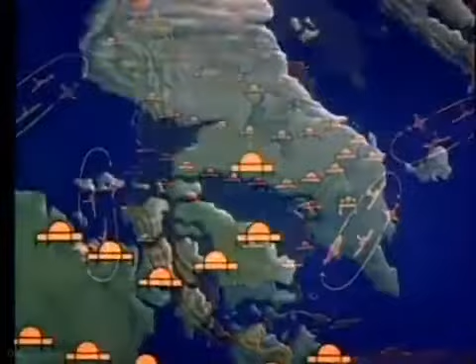These radars never sleep. Round the clock, they stand ready to do their part in minimizing the penetration of enemy bombers. And round the clock, their quietly pulsing hearts, the magnetrons and the klystrons, help generate the power for peace that keeps America strong.

These microwave power tubes, the magnetron to generate the radar signal, the klystron amplifier for radio communication, and radar are the subject of our story.

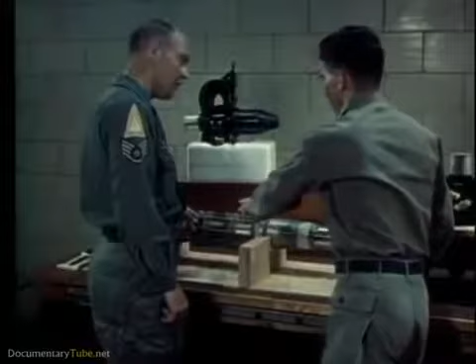It is a story about these vital tubes, but even more about you, the men who work with them. When you have a well-trained maintenance man with a well-adjusted radar at a well-chosen site, then you've really got a winning team.

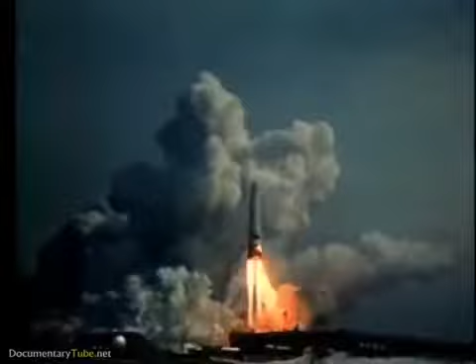They keep the airborne radars operating and ready for crucial missions: in missiles that depend upon radar for guidance, in bombers that depend upon radar for bombing and navigation, in interceptors that depend upon radar for fire control, and in reconnaissance and search aircraft that depend upon radar to extend their vision.

Years of scientific research and millions of dollars worth of equipment have gone into this aircraft. But only if the maintenance men keep the radar functioning can it complete its mission. When something goes wrong, they've got to make a quick decision, whether to attempt repairs in flight or abort the mission.

There's trouble here, that's for sure. But what kind of trouble? First, they check the radar scope presentation. Sometimes this gives a clue. But the most reliable analysis comes from the test equipment on the monitor panel.

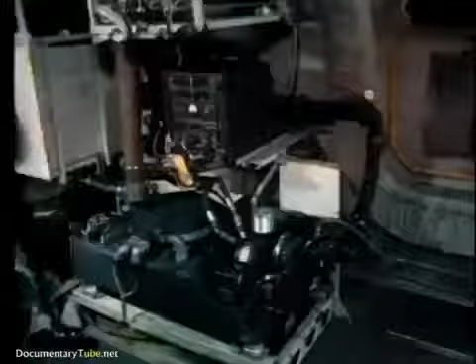Another trouble spot could be the pressurized antenna system. Loss of waveguide pressure will also cause arcing. Yes, the pressure's low. This is a danger signal. If this arcing continues, the magnetron output window may be damaged, the tube's vacuum lost, and the magnetron destroyed.

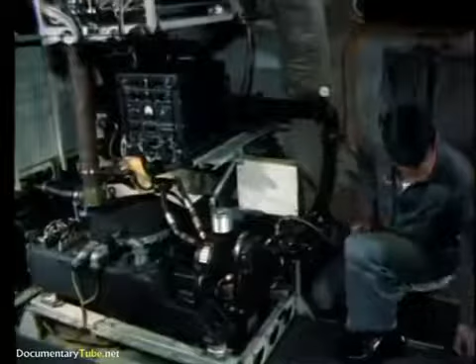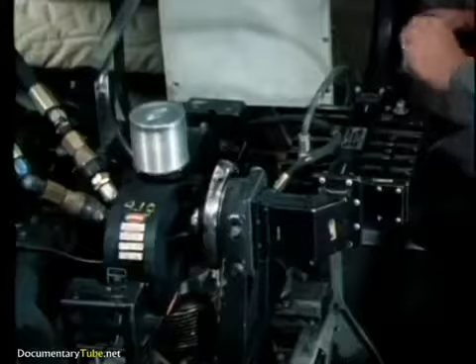Waveguide joints should be tested to make sure they're airtight. This man is making a liquid soap test. See where the bubbles are forming? He's found the trouble. But how serious is it?

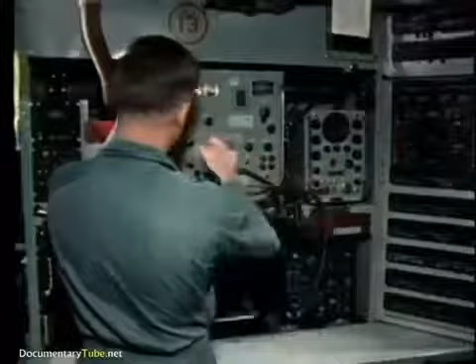He checks the spectrum analyzer again. It looks bad. See how the pulse has changed? Finally, the main pulse deteriorates completely. Bad news. The magnetron is seriously damaged. It's beyond repair. This means shut down the equipment and get ready to install the spare.

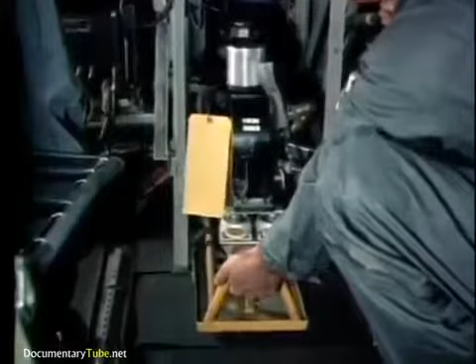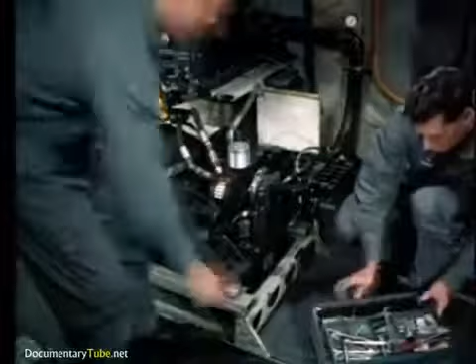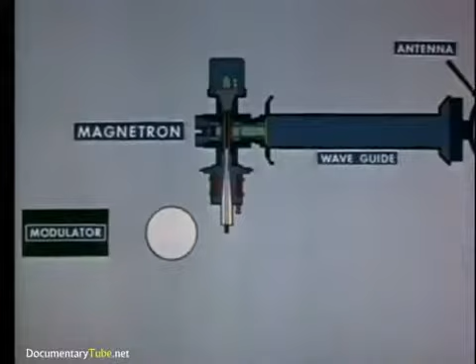While they're working, let's take a look inside the magnetron. Animation shows what caused the malfunction. We'll turn time back a few hours and show the Maggie functioning normally.

As the pulse from the modulator is applied, the Maggie produces radio frequency oscillations to form the radar pulse. This energy is then coupled into the waveguide and directed to the antenna for transmission.

Energy is reflected back along the waveguide toward the magnetron. Normally, when the antenna system is in good shape, the reflected wave won't be strong enough to cause arcing at critical points.

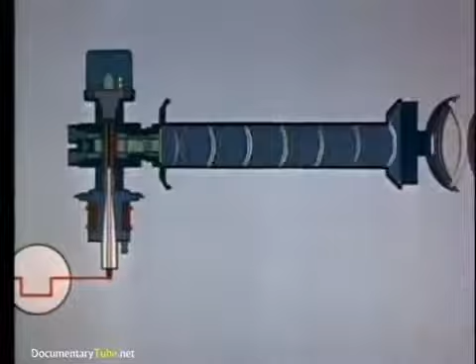But as conditions such as loss of waveguide pressure develop, the antenna characteristics change and the reflected wave becomes greater. Then arcing may take place at the point where the radar wave leaves the magnetron, causing the magnetron output window to crack or puncture.

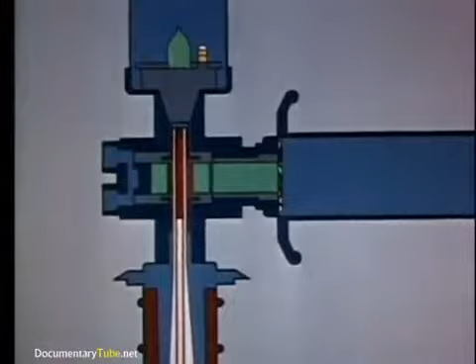As the vacuum is lost, the heater oxidizes and burns out. The cathode cools. Air seeps into the interaction space, and arcing occurs with each pulse.

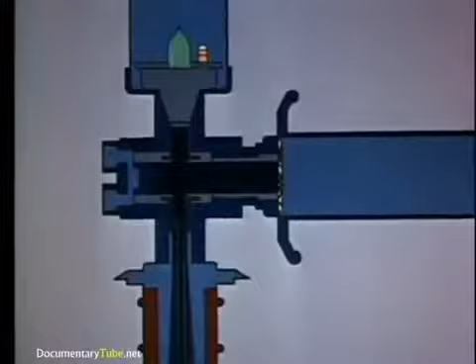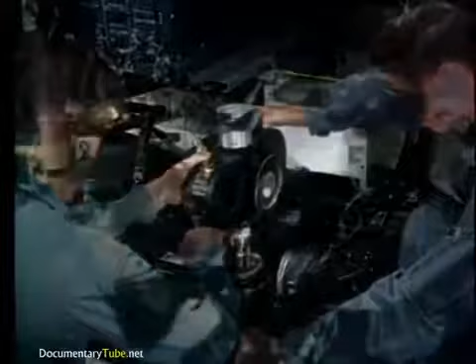After the magnetron has been unbolted, the filament and cathode connections are uncoupled. A large magnetron like this one requires 2 men to handle it safely.

Before a Maggie is replaced, all connections, mating flanges, and sealing surfaces should be inspected. Insulating oil should be examined for foreign matter. Damaged or worn gaskets should be replaced.

Heater's supply voltage should be established at the value marked on the tube. Later, when the plane returns to base, the heater voltage should be double-checked with an accurate instrument.

Now that the spare magnetron has been installed, further tests are necessary. The technician must make sure he has the required pressure and that there are no air leaks. Instructions concerning the care of pressurized antenna systems will be found in the appropriate tech order handbook. The liquid soap method is a simple way to check for pressure leaks and may be used where more accurate means of testing are not available.

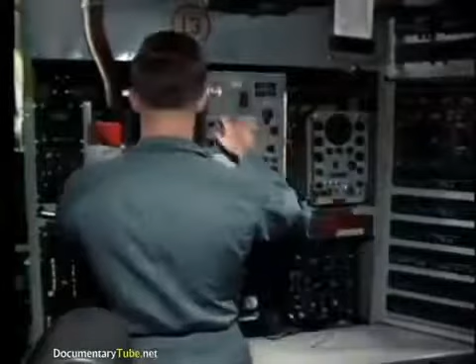Test equipment is used to analyze the performance of a newly installed tube. The output pulse is checked on the spectrum analyzer. See how the large hump, or main bang, is symmetrical and sharply defined. The side lobes are relatively small. A presentation like this means that the Maggie is firing properly.

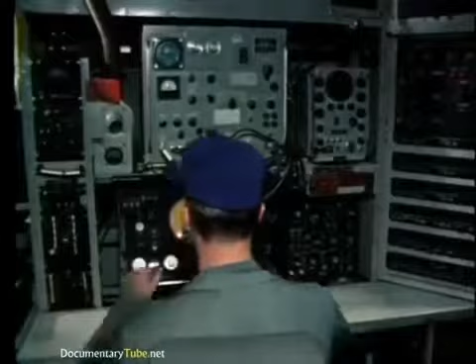Not only that, it means that these technicians know their jobs. They were able to analyze the trouble correctly and replace the magnetron in flight. Because they knew what to do, this aircraft was able to complete its mission.

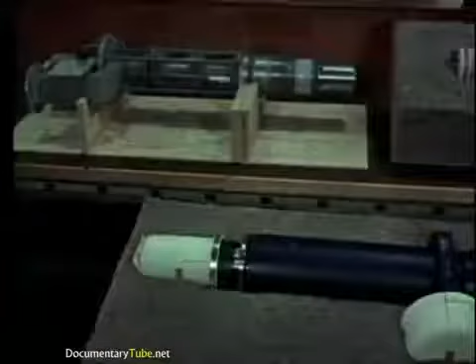Let's take a closer look at these microwave power tubes. Magnetrons costing from $100 to $10,000. Klystrons costing from $1,500 to $25,000. Why so expensive? Let's see what's inside them.

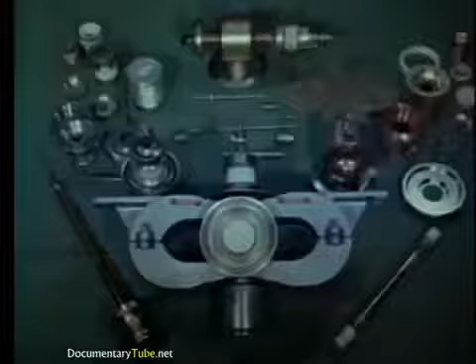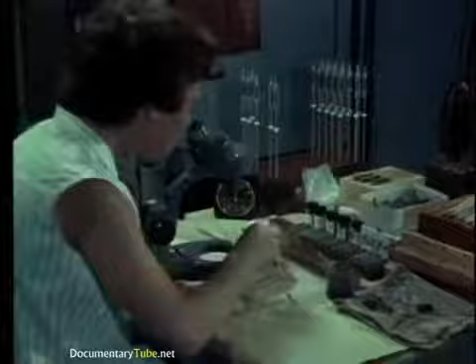Look at this. Parts so critical, they must be inspected through a microscope. Tolerances accurate to 4/1000ths of an inch.

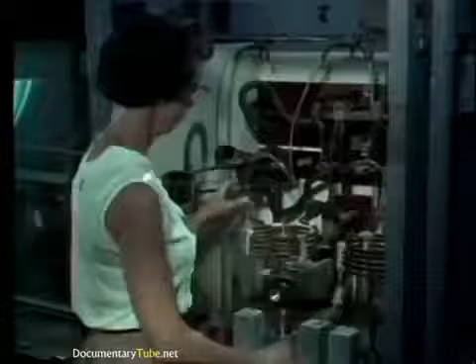To build them to such close tolerances requires involved manufacturing processes. Specialized parts must be carefully assembled.

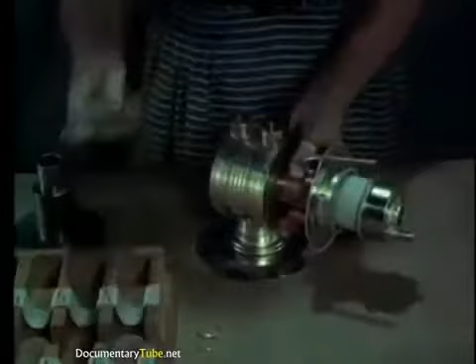The completed assembly is heat-treated to bake out gas molecules, so that they may be removed by an evacuation machine.

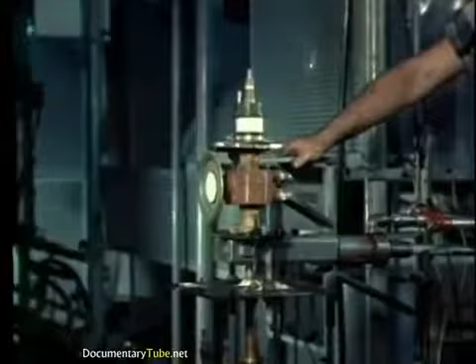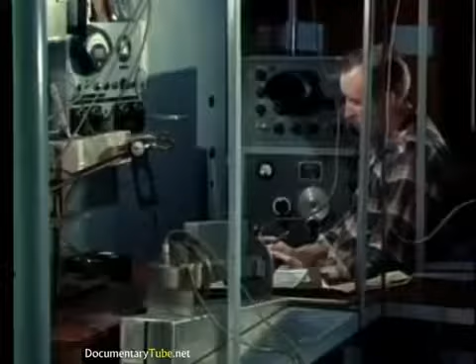External mechanical parts, such as couplings and magnets, are installed. The final step is rigid testing of electrical performance to make sure it meets the high standards required.

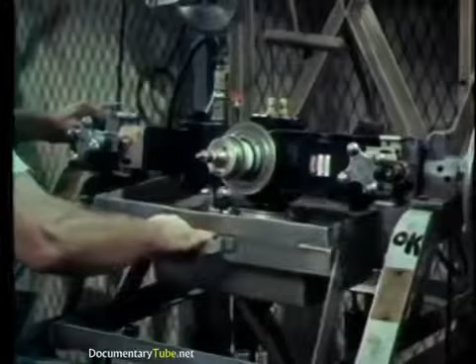Pressure tests ensure leak-proof connections throughout. Now the tubes can be put into storage. Even here, should tiny defects develop while on the shelf, continuous sample testing will reveal them.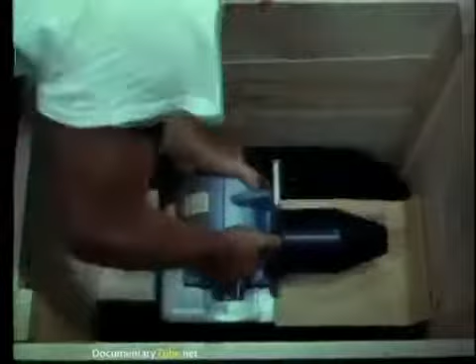Before shipment, the delicate tubes are carefully packaged. The quality designed in during research, built in during manufacture, maintained by rigid testing and careful storage, will reach the user intact.

Here are a few basic rules on proper handling. Always use 2 men to lift a heavy tube. A portion of a carton makes a good tube stand, protecting delicate parts from damage. But a wooden rack is better and lasts longer.

Save all the cartons and packaging materials. Use them to return defective tubes to the factory.

Magnetrons should be separated at least 12 inches. Then their magnetic fields won't interact. Don't store them on steel shelves or they may be degaussed.

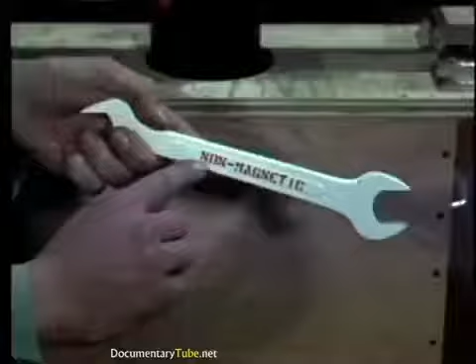Don't use steel tools. Use non-magnetic tools. Following these simple rules will save time and trouble, prevent damage, and save the Air Force many thousands of dollars each year.

On most of the smaller high-performance aircraft like this one, it is not possible to do in-flight radar maintenance. Therefore, most of the work must be done in the electronics maintenance shop. This aircraft has just aborted an intercept training mission. The reason: radar malfunction. Had this mission been the real thing, an enemy bomber could have broken through our defenses.

The maintenance man's job is to find out why the radar malfunctioned and correct the trouble. You'll see that although these radars come in smaller packages than those on larger aircraft, they are just as big a maintenance problem.

The maintenance supervisor is in charge of this work. Before teardown of a defective black box is started, the operational defect should be identified or at least isolated to a particular subchassis. The pilot's report on the radar failure may give a clue.

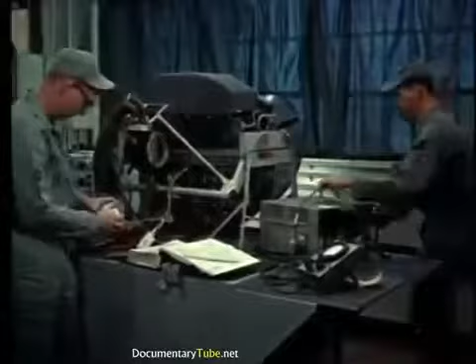Comparing the report of malfunction with equipment handbooks may also help to isolate the defect. But the best aids to repair are the analytical approach of the technician and the special test equipment he uses.

An important point to remember is that the transmitter malfunction may be caused by parts other than the magnetron. Wherever possible, other circuit components should be checked before power is applied. A simple resistance check will often reveal a short circuit.

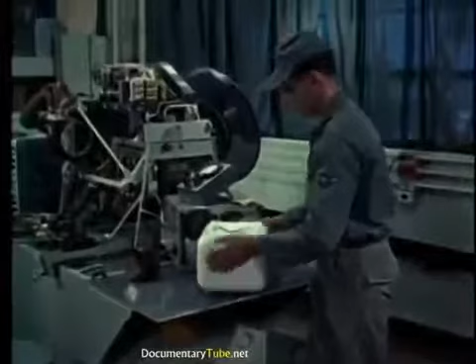That's what the trouble is here. The airman will carry on from here and trace the short circuit. So far, so good. He's found a shorted filament transformer and replaced it with a new one. But what's this? He's decided to change the magnetron, too.

The supervisor disagrees. Tube swapping is not a good idea. The old magnetron should be thoroughly tested before any decision is made.

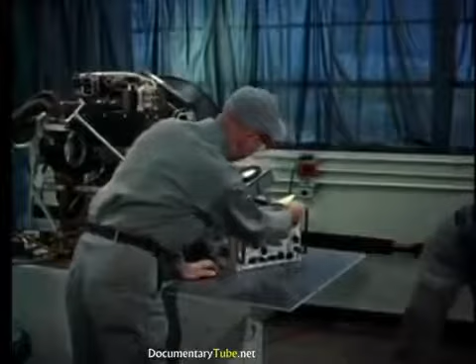Testing showed that the old magnetron should be replaced. This has been done. Now let's see how the new Maggie behaves. This is confusing. The spectrum analyzer shows arcing.

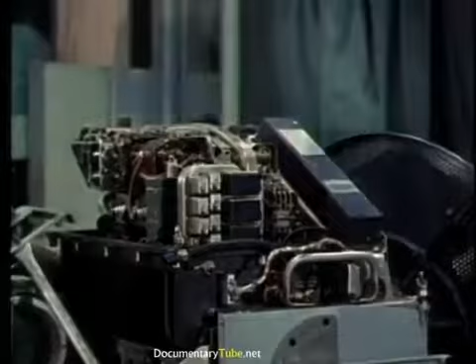Let's look inside the tube and see what's causing it. Magnetrons are made of porous metals, which usually trap a small amount of residual gas.

During storage, gas molecules migrate into the interaction space surrounding the cathode. When the tube is installed and power applied, it will operate normally if the gas content is low. But if gas content is high, arcing will occur with each modulator pulse. This arcing might be mild or severe.

Frequently, tubes with residual gas can be restored to normal operation by a suitable break-in or seasoning period. During break-in, the gas molecules are driven back into the walls of the tube, and normal operation resumes. If the equipment is operated frequently, normal operation should continue throughout the life of the tube.

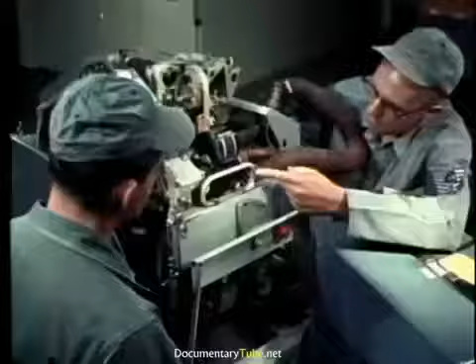Occasional individual arcs may also be noted in a normal tube which does not contain gas, but this behavior is due to transient conditions and should be considered as normal. All new tubes which display arcing when they are first installed should be thoroughly tested and analyzed before being discarded. This will save the government both time and money.

The repairs are finished. Now comes the break-in procedure. Proper break-in can clear up various degrees of internal arcing. But watch the spectrum analyzer carefully. If frequent arcs occur, switch to standby immediately.

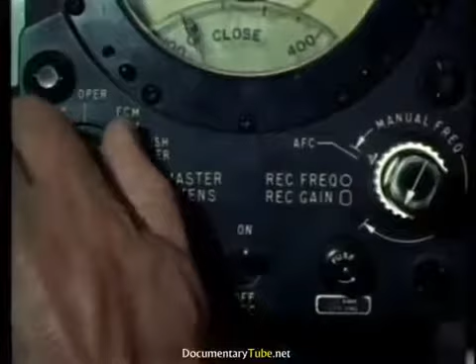Small magnetrons may be damaged if severe arcing is allowed to continue more than 2 seconds. Now the range selector switch must be changed to short pulse before the magnetron is operated.

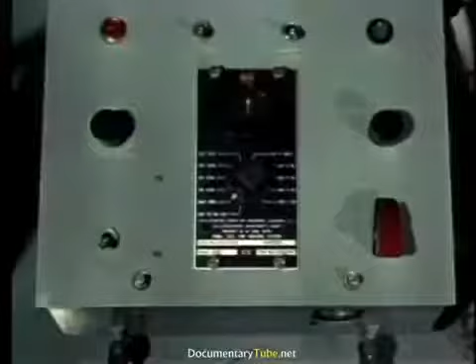If only sporadic arcing occurs, the operation may be continued. But a series of arcs may cause the overload to pop. In this case, reset the switch and continue the break-in.

To avoid possible damage during the break-in, the technician should keep a close watch on modulator tubes and other components of the RT unit. The time required for break-in will vary with the tube, conditions, and methods used. But normally break-in can be accomplished in 20 to 60 minutes. When break-in is complete, and only infrequent arcs or misfirings occur, operation may be regarded as normal, and the equipment made ready for service.

In addition to the airborne radars, there are a great many ground radar sites scattered about the continental United States and Canada. They are found in almost every type of American scene: in the dusty expanse of the plains, in the north woods, the heat and humidity of the deep south, in the rolling farmlands of the Midwest, and the salt water scenes of our coastal areas.

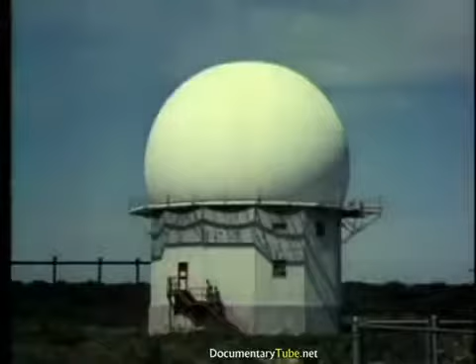Each of these has its own problems of maintaining and efficiently operating its microwave power tubes on a round-the-clock basis. Some of this equipment is completely automatic. But experienced technicians are always nearby, just in case.

At the many radar sites where there is no standby equipment, the maintenance man is an even more vital unit in the organization. In the operations room, observers keep constant watch on the radar scopes. Here's trouble developing.

When equipment starts to malfunction, quick repair is a must. These men are so used to the sound of the equipment, they can tell by listening whether the magnetron is operating or not. It's not.

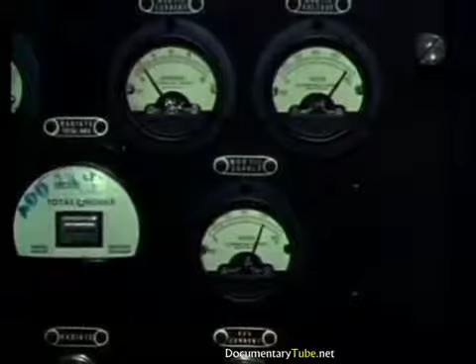Something caused this radar to quit. What was it? Sometimes the meters will tell the story. The filament current has dropped to 0, and the filament voltage is too high, indicating that a portion of the heater element is open. A quick, careful analysis has to be made.

Here is where maintenance skill and training pay off. The question is, has the magnetron become inoperative because of heater failure? Or is there another cause?

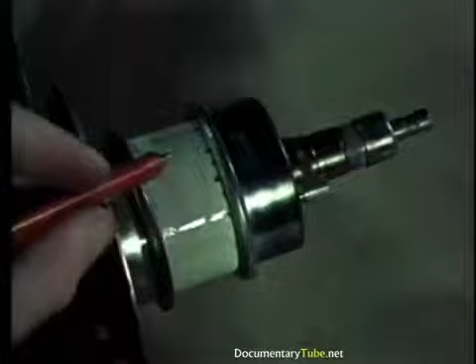Yes, here's something. The insulator is pitted. High-powered magnetrons like this one have insulator bushings immersed in oil. It might be that the insulating oil has broken down. Better check this.

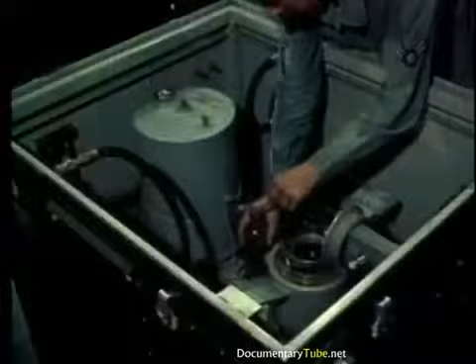Here's the answer. Contaminated oil. The oil failed to insulate. Oil can break down after long exposure to heat and high voltage. Oil may also be contaminated by dust, moisture, metal particles, or air bubbles.

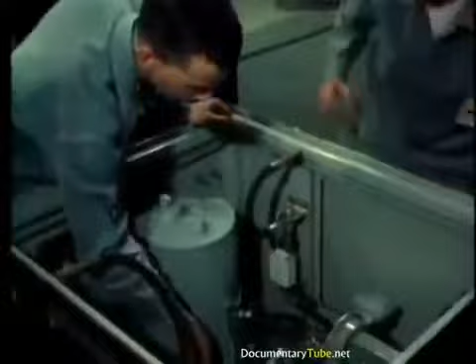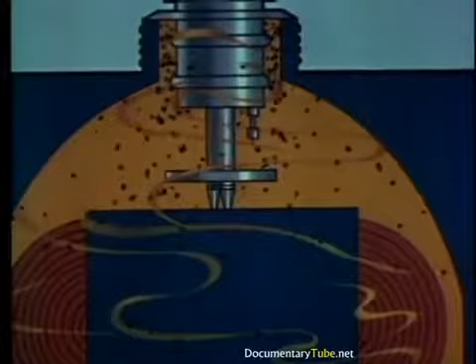Here is how contamination breaks down oil. As contamination accumulates in the oil, current paths are created between high voltage terminals and ground. As the condition becomes worse, due to increase of contamination and change in oil structure, a definite high voltage path for corona discharge is created in the oil.

The corona discharge begins to erode the surfaces of the insulator. As the insulators are penetrated, the vacuum in the tube is destroyed, and the tube is damaged beyond recovery.

The maintenance men have completed oil replacement using all precautions to prevent contamination. They have checked the grade of oil against tech orders and factory instructions.

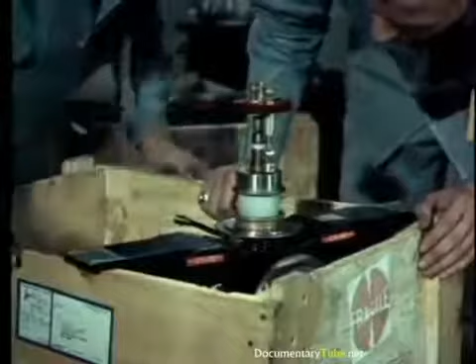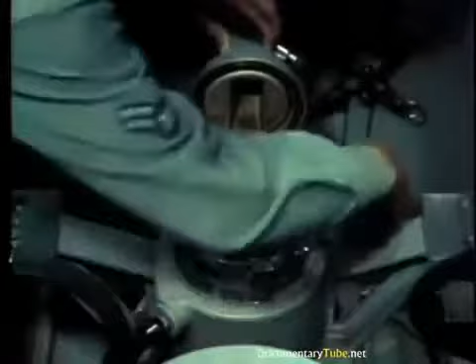But before installing the new Maggie, all mating surfaces and flanges must be inspected and cleaned or replaced as required. It is also necessary to check waveguide parts, replace gaskets, coolant hoses, oil fittings, and so forth.

Be sure all electrical connections are secure. Careful, watch out that terminal doesn't hit the cabinet. That could ruin the tube.

Make certain that all clamps, bolts, coolant hoses, and so forth are secure before operating the tube. All set? Okay, hit the power button. Uh-oh, that one didn't last long.

There are many reasons why new tubes may fail to function properly. One of the primary causes of tube failure is damage sustained during transportation and handling. This damage may occur during shipping or in the depot, or during Air Force distribution to the base.

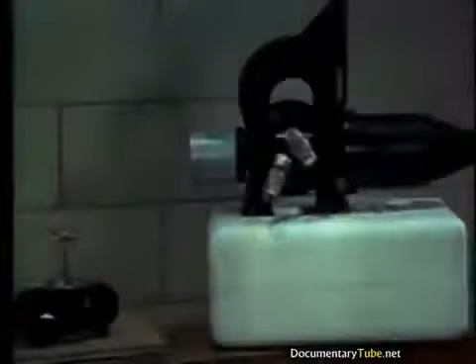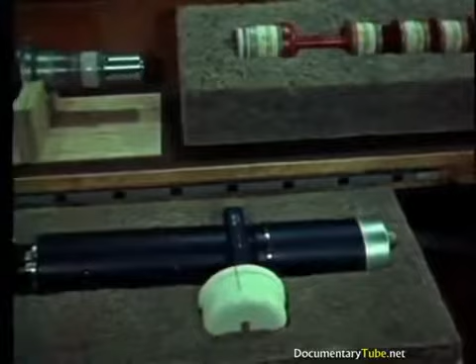The magnetron is only one type of microwave power tube used by the Air Force. Another and very important type is the power klystron. Klystrons are made in many shapes and sizes. All of them are powerful and expensive, all the way from $1,500 to $25,000.

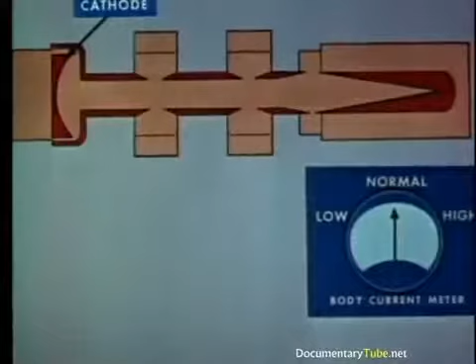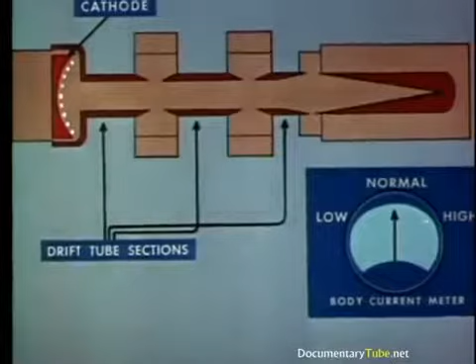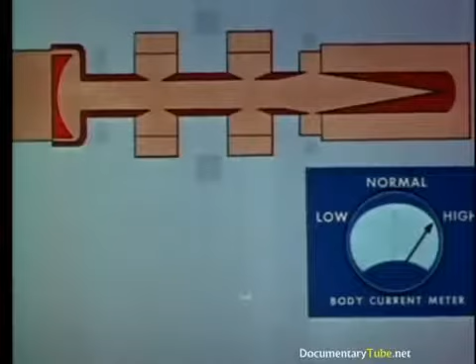Let's look inside a typical two-cavity power klystron and see how it operates. The beam current is emitted by a heated cathode and passes through the drift tube sections. Since electrons in the beam have like charges, they repel each other and tend to diverge, to be absorbed by the walls of the drift tube sections. But electromagnetic coils placed along the tube align them into straight paths.

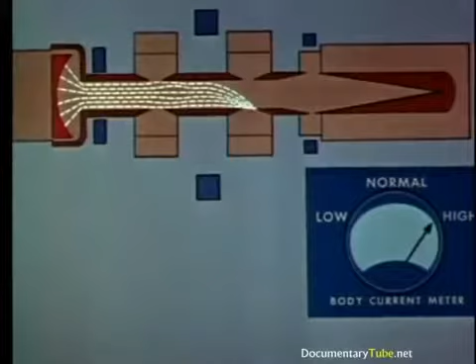However, misalignment of the focus coils can seriously damage the drift tube tips. Therefore, it is most important to adjust the magnetic coil currents properly during installation of the tube.

When a steady, direct current is flowing through the tube, an RF signal from the RF driver stage is introduced into the first cavity resonator. As the cavity is tuned to resonance, a strong RF field appears between the drift tube tips, which form a gap in the resonator. The electrical charges on these tips alternate at the driver frequency rate on opposite sides of the gap.

At the same time, individual electrons in the beam are being accelerated or decelerated at the RF frequency rate. This produces bunching of the electrons as they approach the gap in the second resonator. There they are decelerated and release energy. The resonator converts this energy to RF energy and amplifies it. Additional resonators are sometimes provided for greater amplification. From the last resonator, the amplified RF signal is coupled into the waveguide and transmitted to the antenna.

Various kinds of klystrons are being phased into new Air Force applications, such as these tropospheric scatter communications transmitters. In this way, intelligence may be relayed from remote early warning sites to control centers many hundreds of miles away.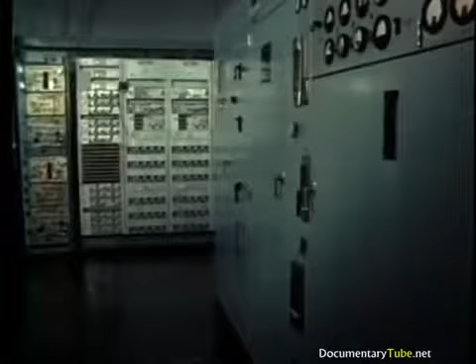This transmitter has dual equipment. One transmitter operates while the other is on standby in case of emergency. The equipment is automatic. Meters and instruments keep a constant check on its operation. And a warning light flashes in case of trouble.

And speaking of trouble, a glance at the meters tells them the trouble is in the transmitter output. The equipment is reoperated. Readjustment of the output cavity and coupler may correct the trouble, but the arcing continues.

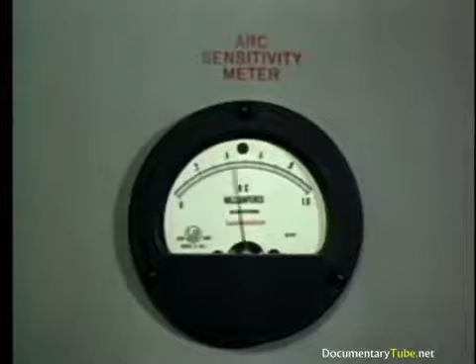Since adjustment won't correct the trouble, all they can do is shut down the transmitter for repair and switch over to standby.

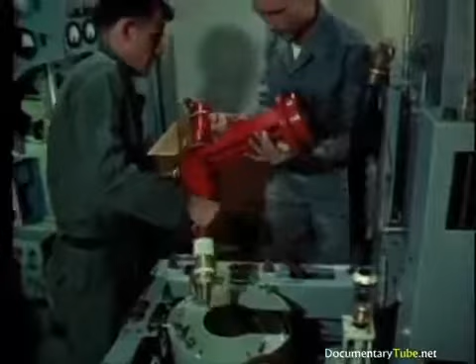The klystron has been removed for inspection. It may have been damaged by the arcing. Yes, the output ceramic is badly damaged.

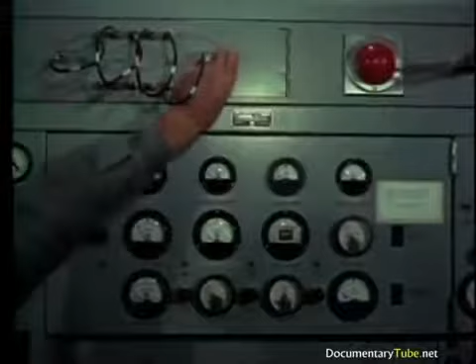An important consideration in maintaining the klystron is the proper adjustment of the impedance matching unit. In this case, improper adjustment of this unit during installation ultimately caused the arcing in the output section, which in turn destroyed the tube.

There are two types of meters which help maintain proper coupling: the power output meter and the VSWR, or voltage standing wave ratio meter. These measuring devices should periodically be checked for accuracy.

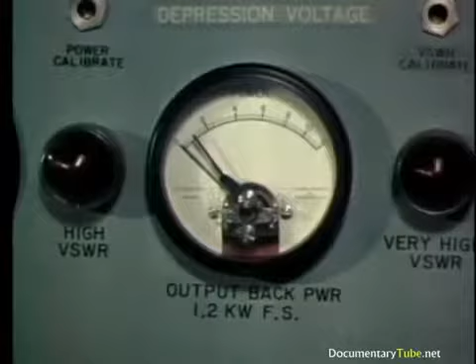But in general, the best way to avoid damaging or destroying the klystron is to study and thoroughly understand the various installation and operating instructions furnished by the equipment and tube manufacturers. Only by doing this can the Air Force technicians and maintenance men hope to get the full operating life from their klystrons.

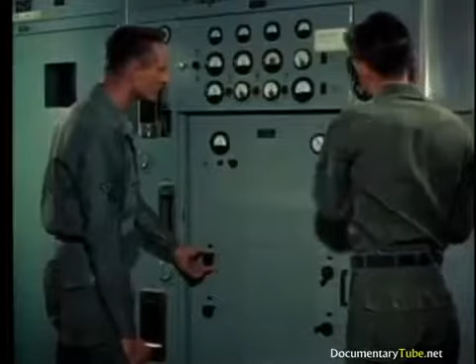At the Tropo Shack, the maintenance men have installed the new klystron. But before operating at full power, they are careful to recheck all circuit meter readings and coolant flow gauges. These meters are important because a minor error in one of the adjustments might shorten the life of the tube.

The power klystron is really a very dependable piece of equipment if properly treated. Once it has been correctly installed and aligned, it requires very little maintenance during its long service life. A good rule to follow is: install it carefully, align it properly, then leave it alone.

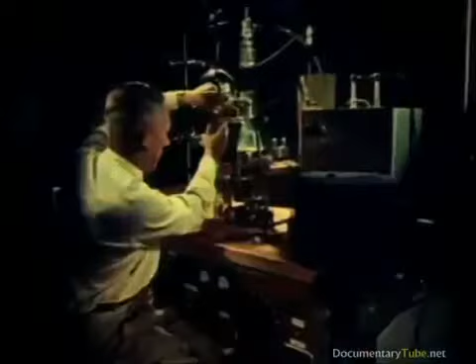As the progress of aircraft and air defense continues, other and more varied uses will undoubtedly be found for microwave power tubes. With these new applications will come new problems to be solved by maintenance men of the future. Those men will tread the paths charted by technicians of today, who found that this type of maintenance can be simplified by careful attention to four basic factors:

Careful handling, proper break-in, avoidance of tube swapping and trial and error maintenance, and the timely use of maintenance aids such as test equipment, tech order handbooks, and manufacturer's information pamphlets.

There is no substitute for know-how, initiative, and ingenuity. Yet no one man or group of men can do this job alone. Maintenance is a team effort. Only by the cooperation of procurement, supply, transportation, and every department concerned can the Air Force continue to operate the reliable radar equipment which is such a vital part of national defense.

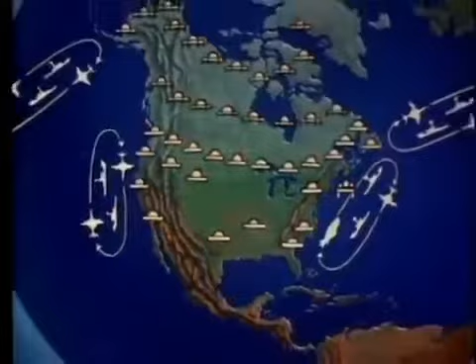Only by continued teamwork and devotion to duty can the radar eyes of America guide us to that peaceful tomorrow, which is the reward of nations who stay alert today.

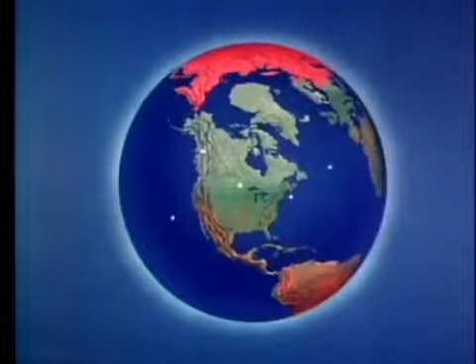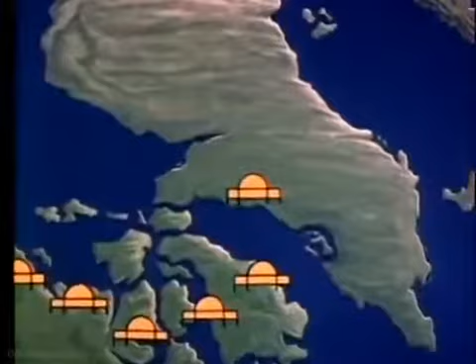From the polar ice cap to the Mexican border is a giant with 1,000 eyes. Day and night, fair weather or foul, he guards his homeland. This giant is the air defense system of North America, a vast and intricate maze of radar networks. And through the electronic eyes of this giant, we are able to see the enemy before the enemy sees us.

These radars never sleep. Round the clock, they stand ready to do their part in minimizing the penetration of enemy bombers. And round the clock, their quietly pulsing hearts, the magnetrons and the klystrons, help generate the power for peace that keeps America strong.

These microwave power tubes: the output pulse of this radar transmitter is definitely abnormal. This is the way it ought to look. But this presentation clearly shows a disturbance, probably caused by arcing in the antenna waveguide.

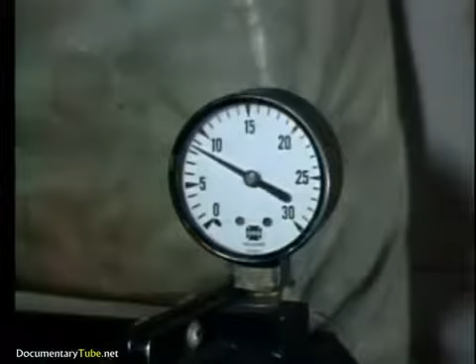The cause might be moisture in the waveguide, corrosion, dents, or scratches. Another trouble spot could be the pressurized antenna system. Loss of waveguide pressure will also cause arcing. Yes, the pressure's low. This is a danger signal. If this arcing continues, the magnetron output window may be damaged, the tube's vacuum lost, and the magnetron destroyed.

It is a story about these vital tubes, but even more about you, the men who work with them. When you have a well-trained maintenance man with a well-adjusted radar at a well-chosen site, then you've really got a winning team.

They keep the airborne radars operating and ready for crucial missions. In missiles that depend upon radar for guidance. In bombers that depend upon radar for bombing and navigation. In interceptors that depend upon radar for fire control.

Soap test. See where the bubbles are forming? He's found the trouble. But how serious is it?

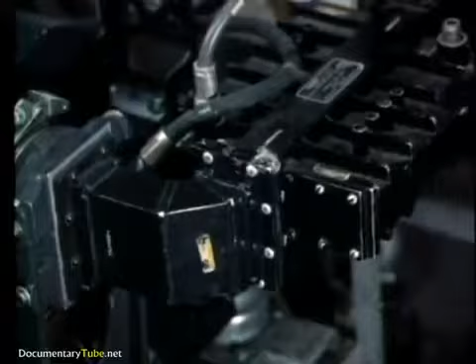He checks the spectrum analyzer again. It looks bad. See how the pulse has changed? Finally, the main pulse deteriorates completely. Bad news. The magnetron is seriously damaged. It's beyond repair. This means shut down the equipment and get ready to install the spare.

And in reconnaissance and search aircraft that depend upon radar to extend their vision. Years of scientific research and millions of dollars worth of equipment have gone into this aircraft. But only if the maintenance men keep the radar functioning can it complete its mission.

When something goes wrong, they've got to make a quick decision, whether to attempt repairs in flight or abort the mission. There's trouble here, that's for sure. But what kind of trouble?

First, they check the radar scope presentation. Sometimes this gives a clue. But the most reliable analysis comes from the test equipment on the monitor panel. The spectrum analyzer shows them the conditions in the circuit. It tells them what part of the equipment is malfunctioning and helps trace the cause of trouble. Here's the RF